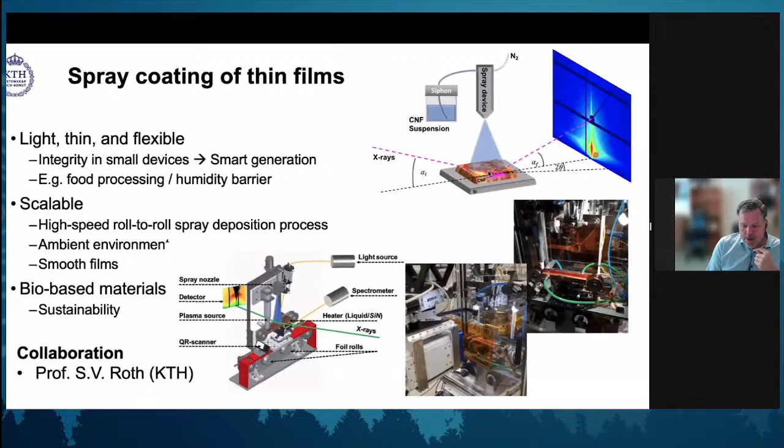Looking at what you get if you use X-rays, so going back one step with grazing incidence coming in, in this case it's X-rays. We will see the effect of spraying on a surface. The reflection you get from the X-rays will be dependent on the nanostructure of this film. So this pattern that we will see is directly dependent on what happens on the surface. And just to show a little bit of the time resolution you can achieve by doing this.

So here we have the spray. We're spraying a film, and we can heat it as well. We can dry it. We can actually see dynamics. So what we'll see is a pattern that changes depending on, now we're spraying a particle with pulses, and then you can also see how this gradually then freezes and becomes a nanoparticle or a nanostructure material. So this is X-rays, and it gives you dynamics.

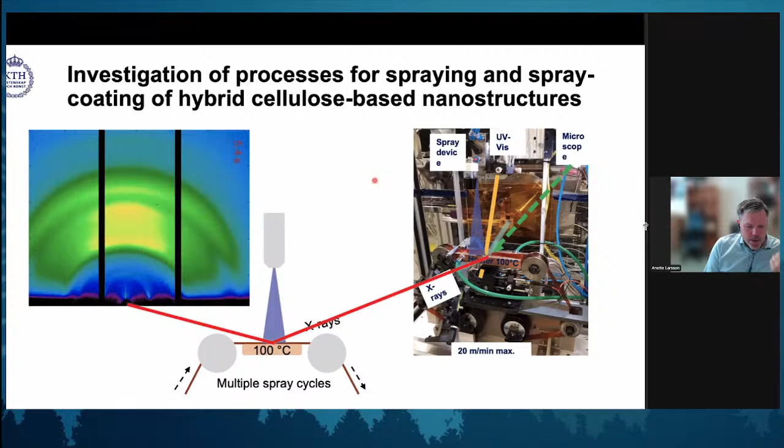So in looking in this, I will talk about two things. Grazing incidence is trying to use the full field or the full detector image by having an incident beam. In this case, I formulated also that grazing incidence scattering. You can do it with neutrons, and you can do it with X-rays. What you will get in grazing incidence is that you get a detector image, and you can use both the lateral and the vertical information to characterize the structure you have in the film.

And we can actually adjust penetration depth, and by looking at this sort of behavior, we can look at nanoparticle heights, roughness, or distances and radius of structure. And we'll get back to that throughout the presentation.

So just taking this simple sample of spraying some fiber-based material. So this is a spraying of TEMPO CNF, different charges. So it actually means a couple of things. It means that it behaves differently because of the surface charge. And the second part is that actually the morphology of the CNF is changing.

By doing this spraying, creating films, you can actually look at the films you get topographically. So that was what we have here. We have, in this case, four different charges. They look slightly different. You can, of course, with AFM start to try to characterize what you see here.

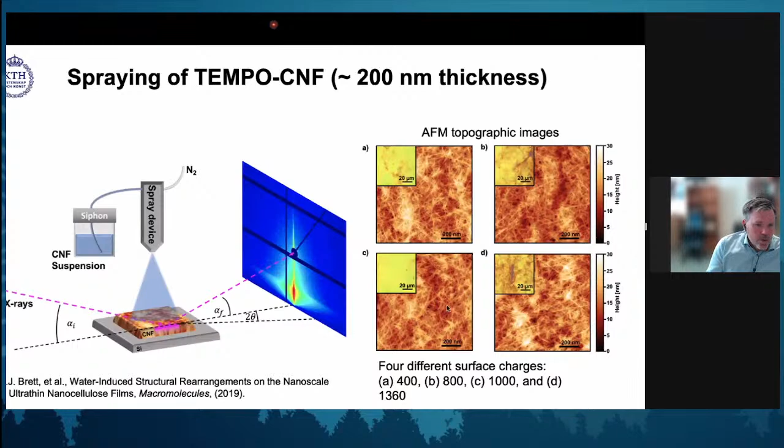Let's assume that everything is simple, and then set up a model that is actually paracrystalline. It assumes that everything we see in the film, if you look at the film from the top, you can see a hole, or you can see fibers stacked together. Let's pretend that when the X-ray comes in, we can depict them all by having these cylinders, and we will choose to have cylinders of a couple of different sizes.

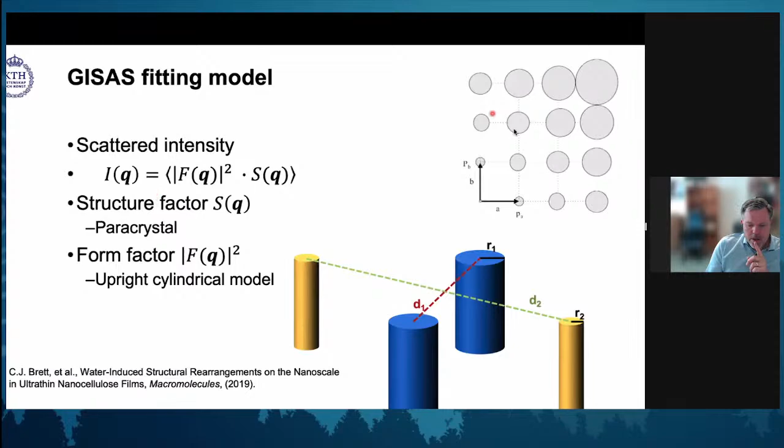So we actually determine that we have a cylinder of a given diameter, distance between themselves, and a different diameter with radius. So we can actually have a set of various sizes. And by doing the grazing incidence, we can take this model, we can fit it to the data. And again, we are fitting now the full field, the full image that we have here.

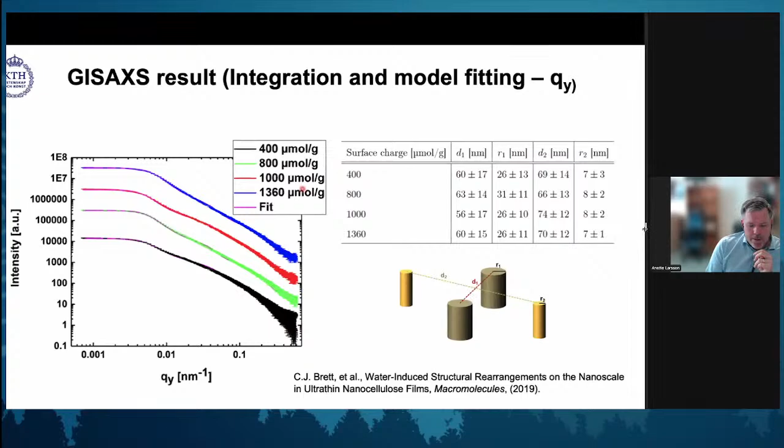If you then integrate it and look at what happens, I will go back, in the Y direction here, we are looking into what happens in the plane of the film as we see it with the incoming beam. What we can see is that we get integrated scattering curves. We can take this model that we have developed and we can fit it. And we can fit it for different charges.

Depending on surface charge, we can determine the structure. If you look at this, you can fit almost everything with two types of objects: something with a large radius and a distance of about 60 nanometers, and something with a small radius with about the same distance. This model fits these curves fairly well.

This gives insight about some sort of bimodal size distribution in the films. This is only looking at material structure, but with cellulose materials we're also sometimes interested in water. It seems water is a problem for most materials, so what happens if you subject these dried films to water?

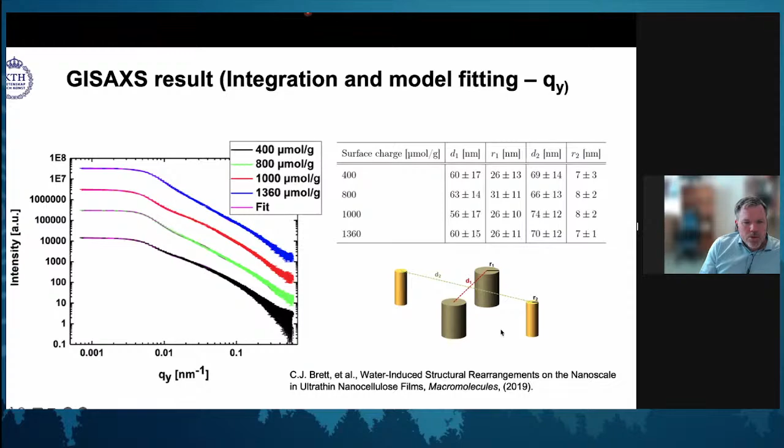If we do this with X-rays, we can still do the characterization, but the X-rays won't make much difference between the water and the cellulose in principle. Cellulose is very close to water, except there's a carbon atom for every water molecule, so it's very hard to differentiate between the water and the cellulose.

So we chose to try this with neutrons. This has a little bit to do with neutrons and a little bit with Japan. We don't have ESS, so we went to one of the best sources available, J-PARC, which is not so far from Fukushima in Japan.

At J-PARC we have a set of PhD students, including Calvin, the main and lead author of this work. What we did, aside from trying Japanese food, was run experiments with different types of neutron techniques. You need a few people to do these experiments. My own experience is that it's slower than doing experiments with X-rays; all measurements take longer.

So what can we do now with neutrons instead of X-rays? We still have a sprayed film. Now, by using D2O, we can exploit the fact that neutrons treat hydrogen and deuterium differently—it's highly absorbed by hydrogen and not by deuterium. So we can start to look at what happens when we add water with deuterium.

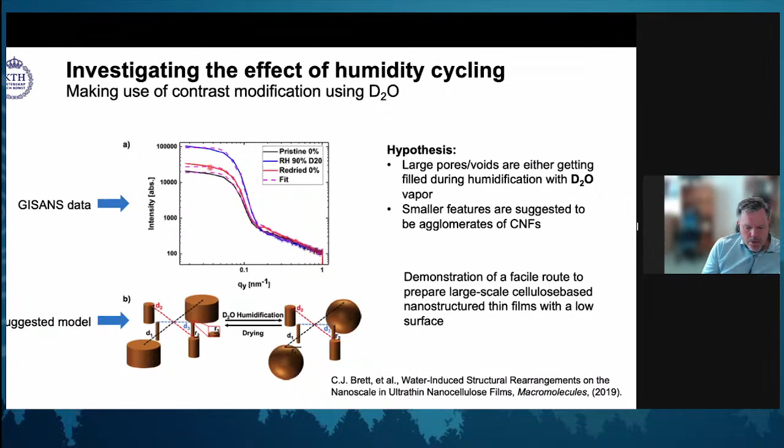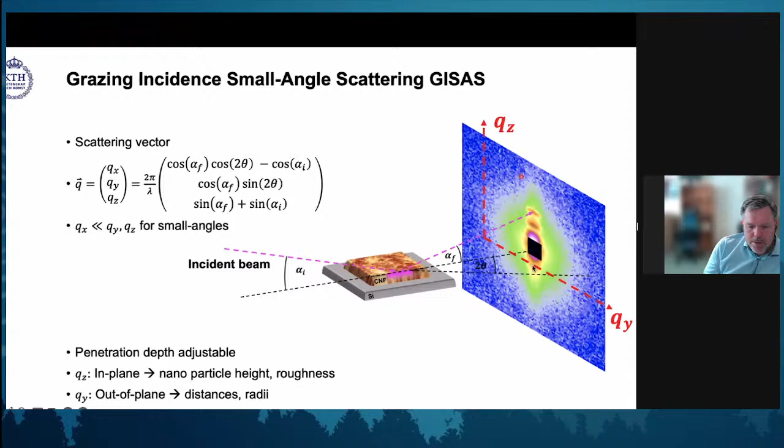Sorry for that. So again, we've been talking about grazing incidence, and we're interested in the full field you can get out of this. Another possibility is to restrict this to only one component, the one out of plane or normal to the surface—working with something called neutron reflectometry.

By doing neutron reflectometry, we can go back and try to understand what happens through the thickness of the film. We get something called the neutron scattering length density as a function of our measurement, which can characterize the density of the material, the amount of material throughout the sheet.

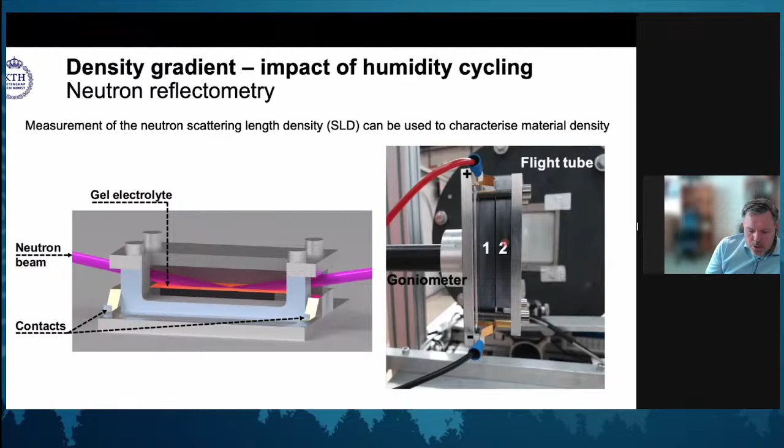So in this case, we have a neutron beam, and our film mounted into the neutron beam. We are looking at what happens only out of plane here, the thickness direction. What we get is an intensity curve throughout the thickness of the sheet. This QZ, which is the inverse, can be translated into the neutron scattering length density as a function of position in our film.

What we can see in this case is that we can understand the effects of humidity cycling and see how that affects the density of the film. By doing all of these things, we can separate water behavior from the dry structure, and then start to think about what the effect of this is.

These measurements typically took an hour to do per sample. In reality, if you do this type of measurement, I want to show how fast the system can be. In this case, we have just sprayed a CNF film on a wafer.

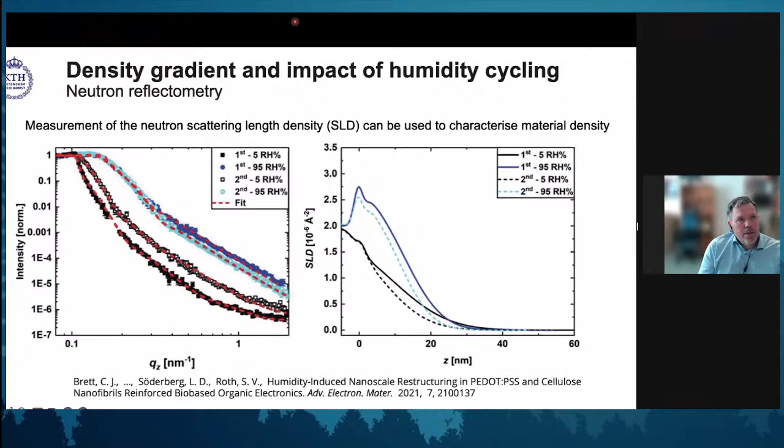Then you can start to think about why do we use neutrons and water. Yes, we want to understand the structural changes. I want to point out that for anyone interested, there is an excellent paper made quite recently that starts to look at something called quasi-elastic neutron scattering.

It is a little bit more advanced technique, needing more material. You can't do this on a thin film, but what you can do is actually use the quasi-elastic neutron scattering to start to think about what is the diffusion of water in a material.

They have done this for different types of CNF and bacterial cellulose, and you can start to understand how water diffuses in cellulosic materials. That makes it possible to separate the diffusion that happens in the spheres we saw when doing our grazing incidence, from the more slow diffuse motion that can also be seen as a part of the structure in itself.

I suggest this is an interesting technique. It has challenges. We are going to try to do it ourselves, but these are the first that I've seen doing it. And as I said, it doesn't work with films—it needs much thicker objects.

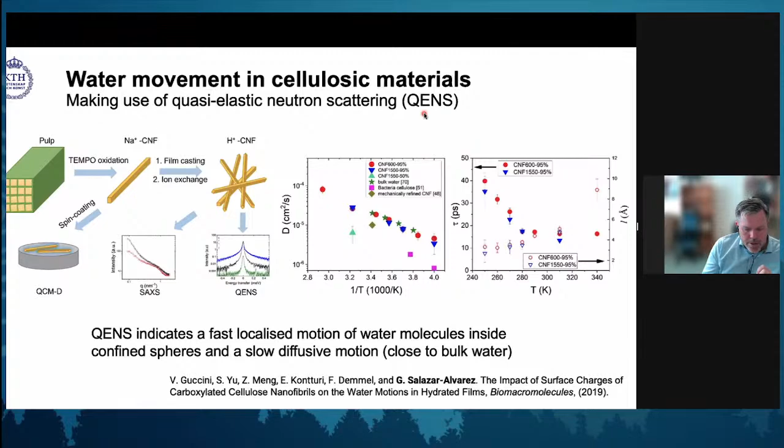So that's two ways of using neutrons. I also think that neutrons have an excellent capability to be used for industrial purposes. Now we're no longer talking about understanding the nanostructure as a potential for future reactive materials—that's the one we saw with Calvin breathing on this surface-coated wafer.

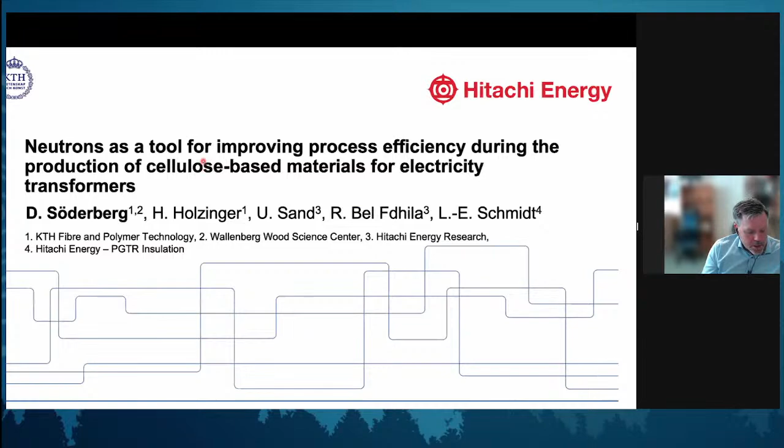We've also been trying to look at what happens for process efficiency, and we're going to look at neutrons as a tool for cellulose-based materials for electricity transformers. The starting point of this is to understand something that I don't think everyone knows.

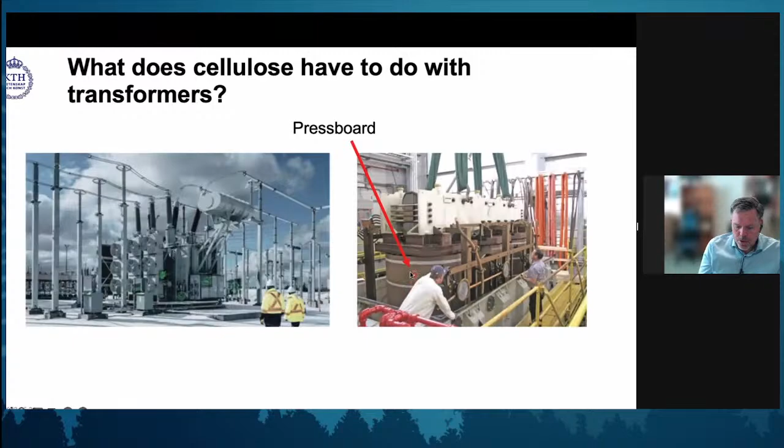It's typically formed by pressing thick cellulose sheets. So what we see here is produced pressboard. See it as a paper sheet, but much thicker. It's made by having sheets that are pressed together, wet, with a certain force, adding heat.

Inside, when you do this, you actually have to add something called wires. And what you do is just press these together, apply the heat, and create a high-density cellulosic material in the center.

This is a process that is well known. It has been used for a long time. Of course, this really is dependent on energy - how much energy do you consume?

One of the key challenges is to both try to optimize energy usage, so you want to reduce energy demand, save lower carbon emission footprint, but you also want to understand the structure of this material, because the pressboard needs to be very uniform as well, not to induce any type of shortages. Because if you have a structure with, for example, a pinhole, you would risk that the transformer burns, which they do from time to time.

So to try to understand this, we start by thinking about what was important. Of course, you have pulp properties that always tend to be important, so the cellulose fibers are a special type - you can't use any type of cellulose fibers. We also know that the fiber network mat that you create is of importance.

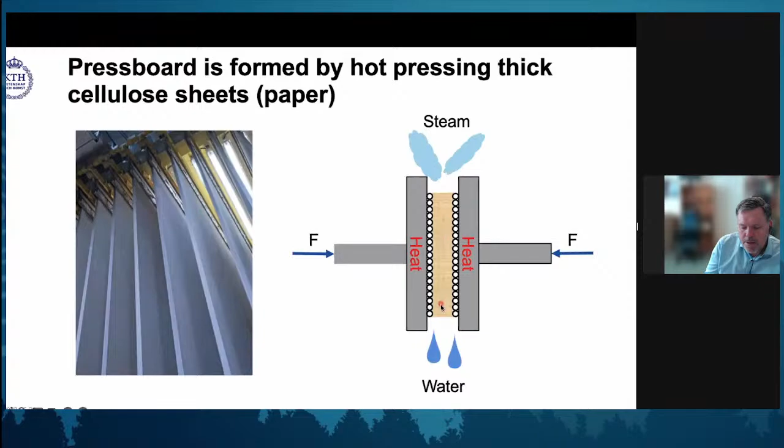What we had as an aim was to understand what happens inside this material. Can we see any type of phenomena that is related to any of these physics that we are interested in?

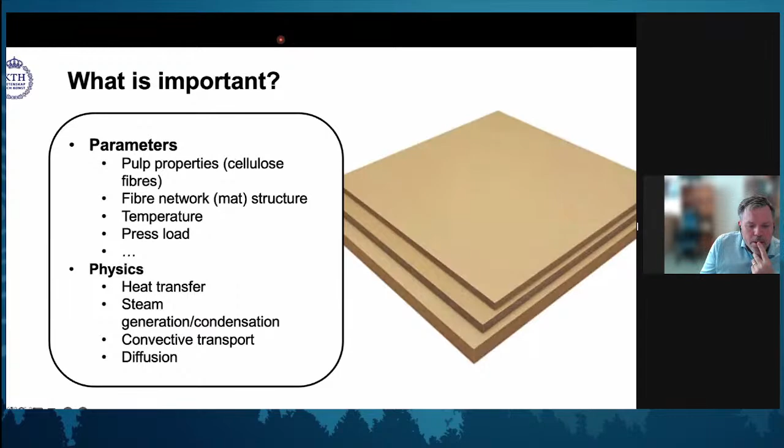So what we did was spend quite a lot of time, and maybe we did not do the correct thing from the beginning - we started to design a setup where we wanted to be able to subject a cellulose bed to heat and pressure and everything.

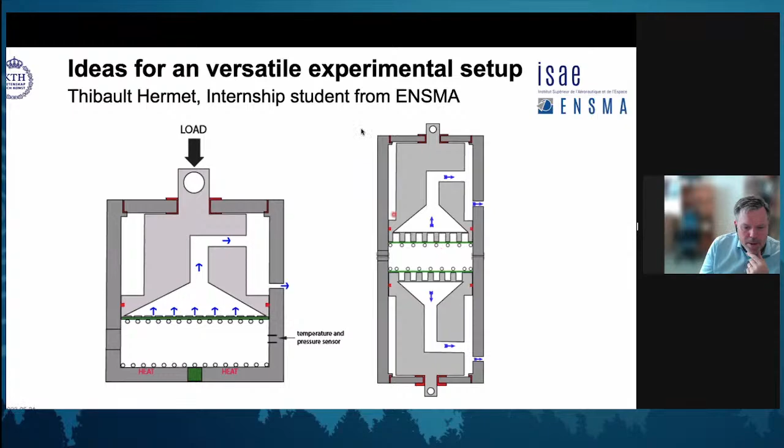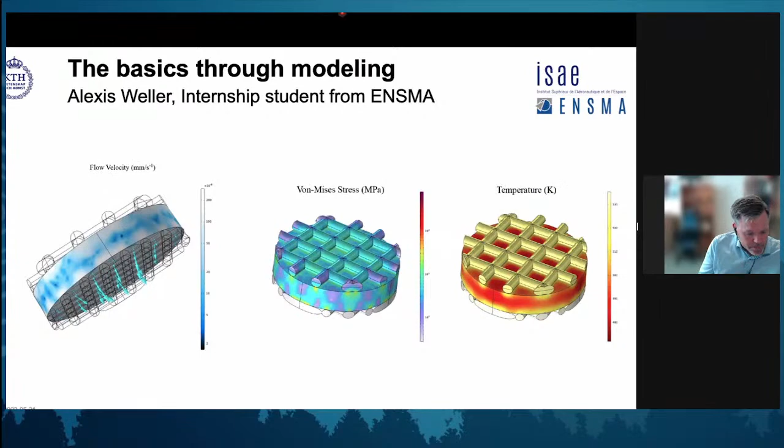We did quite a lot of modeling on this as well, to try to see if we can predict and get a nice design on the system. However, it ended up with another first step, which I always would recommend: reduce the complexity. So all of the first thinking was to have advanced measurement techniques, advanced modeling, but we got

Can you see the spotlight? We can see your marker, but not any spotlight. No, it has disappeared from my screen. So, and the marker, that makes it even more interesting. Let's see if we can - one second, do you still see the marker? Yes, we do. Yes, thank you.

So we ended up with: what is the feasibility of this type of studies? We actually purchased the instrument time through the Vinnova funding. That means that you're not applying for time. It's a little bit faster. We did some measurements for 2 days.

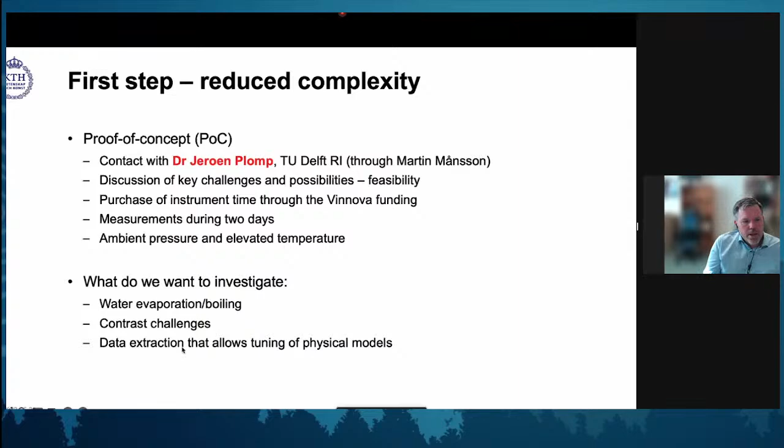We realized that we can't do too much initially with pressure. That requires a lot of safety concerns if you want to work at high pressures, if you at the same time want an elevated temperature, because then it's steam under pressure, and that requires some developments. It ended up with a question that we really want to look at water evaporation and boiling. We want to see what we can actually see in the system, and of course, what can we extract as data.

So instead of this complicated system, we ended up with this very simple wafer design, and that was Jeroen's suggestion. This is a wafer structure made in pure aluminum. So all parts are aluminum, except the bolts. You will get to that. In between, in this wafer, we can put in the fiber mat that is wet. We can't apply pressure, but we can put in something called shims, so we can restrict the dimensions, which of course implies a certain pressure. So we can have different volumes with the same amount of fiber.

We have a holder so that this sheet doesn't by some means fly away when you generate steam. And we can heat the system. We can send the neutrons into this and have the detector on the other side and image what happens to this when heating. So it was a very simple setup, and that turned out to be really good.

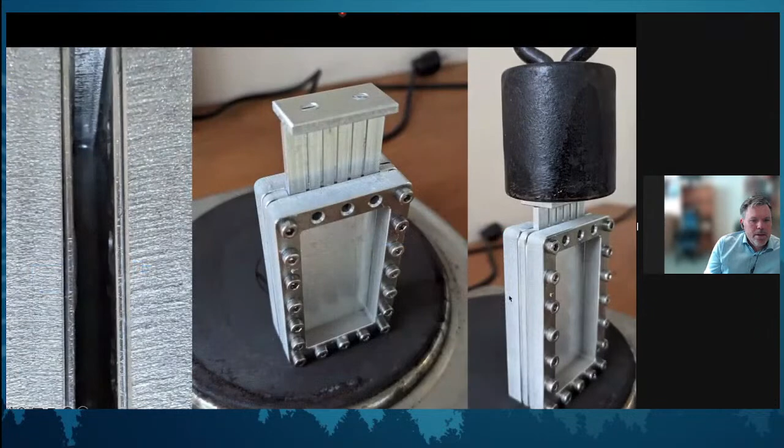Talk about heating. We didn't choose the most complicated heating mechanism. This is a heating plate. It's a stove that was put in a neutron beam. So you could actually lift it up to get in contact with this aluminum wafer system. And then by using an IR camera, we could see that the heating of the aluminum is very, very quick. So this was the only heating we had.

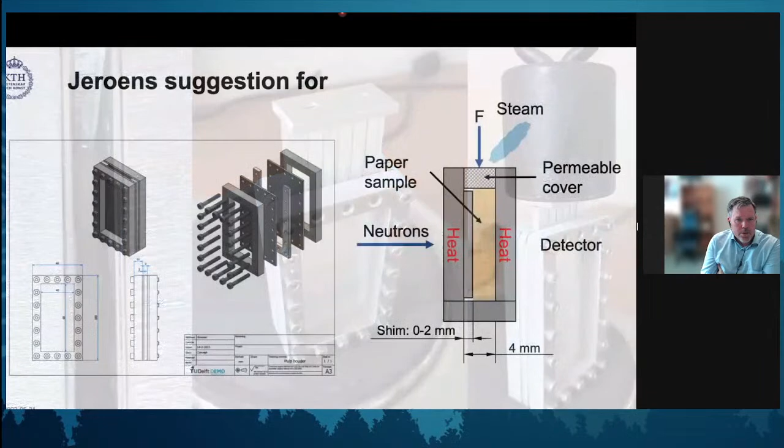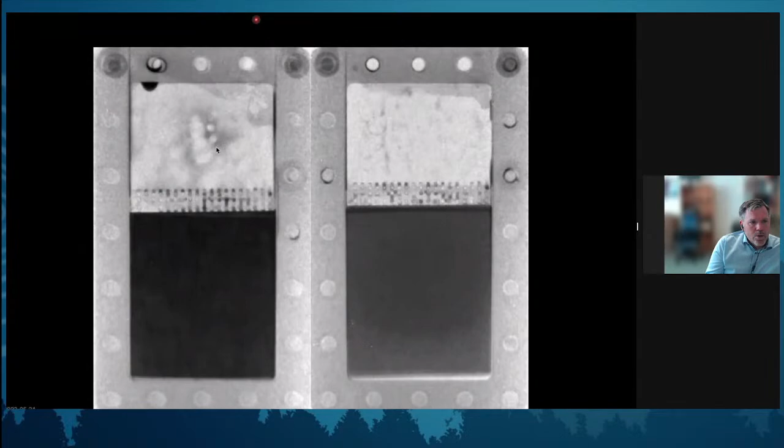And now we're going to see two different measurements made at two different times, but with the same time resolution. There are 2 seconds between each image. And we can see that we are heating it up. We can see that water is disappearing from the holes. We can also see that something is starting to happen inside. You can see that it's boiling here even. So all water has to go out through the top. This is then the place holder for the system.

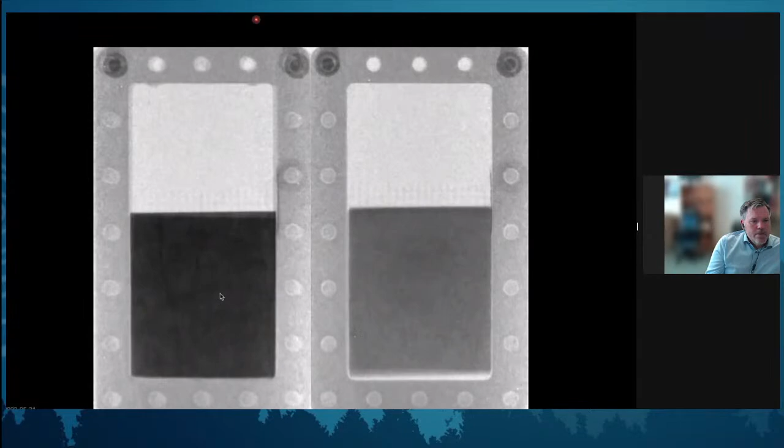We can see that in the right one something happens, there's a spot here, and what happens is that it dries. And when the right one has dried, we still have not dried the left one that had twice the amount of water. Now we can see that it starts to dry eventually at the edges.

And it takes a much longer time to dry for the left one than the right one. Sorry. So what we see is that it dries, and we get a spot in the center as well here. And when we reach the total, all water is taken away, we can see that the amount of cellulose is actually the same. So the only thing that differed when we started was that we had about twice the amount of water in the left one.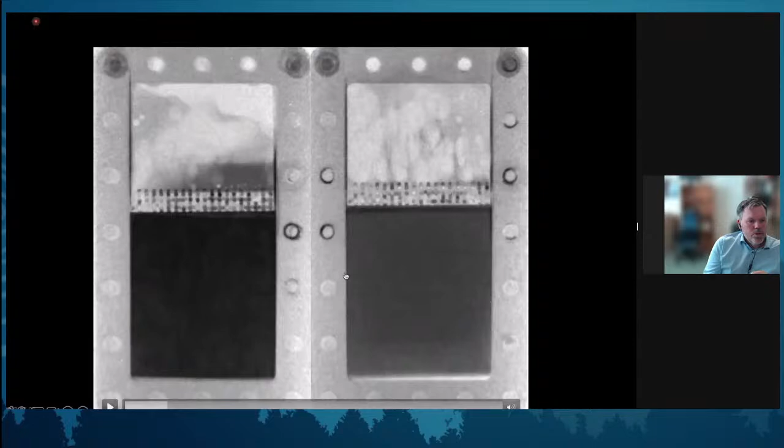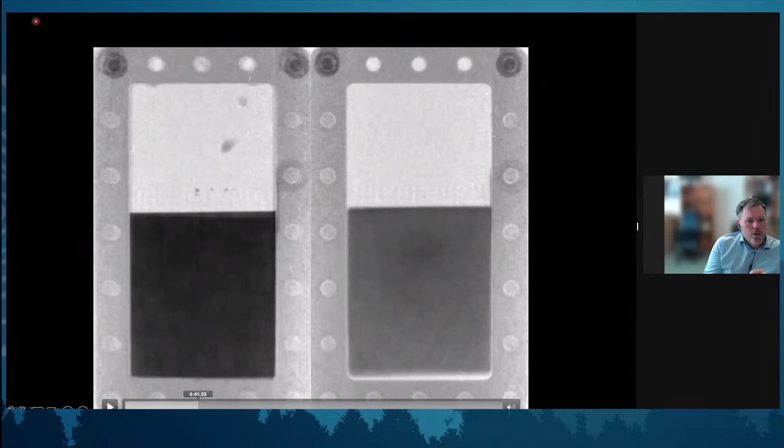And at the end, we can only see the cellulose because it's hydrogen there. It's the same amount of cellulose, so we can actually see also a little bit of the structure of the material. Just to point out something that happens in the end when drying. So please have a look at the right one. Look at the edge when we're drying now. So we have water still here. This is dry. And then now all water is gone. And the last thing that happens is that this piece of cellulose actually also shrinks. So we can study the shrinkage of the material.

So then you can ask what can you get out of this? Then comes the part that will be in the exam for this seminar. There are actually models, and this is nothing that we did. We just took it from literature, but this is boiling because that's what we're studying. We have a static porous media, since we're not dynamically compressing it, but we just have the same amount of fibers. It's kind of static, it's porous. And then you have a set of equations describing the boiling, which means that you have both water and you have vapor, because you can have the different phases. You can have a vapor phase and you can have a liquid phase.

If you take all of this, you can actually take the measurements that were done, very simple measurements. It's a 2D measurement, so that of course contains information of what happens because we have a shrinking blob in the center. But if you evaluate the drying of it, you can actually take the measurement and extract data for modeling. So when we have the measurement, we knew that the amount of neutrons that we detect is related to the amount of water we have. So by this, we can actually normalize it such that we can measure the exact amount of water and fit the model as depicted to what we have seen in the image.

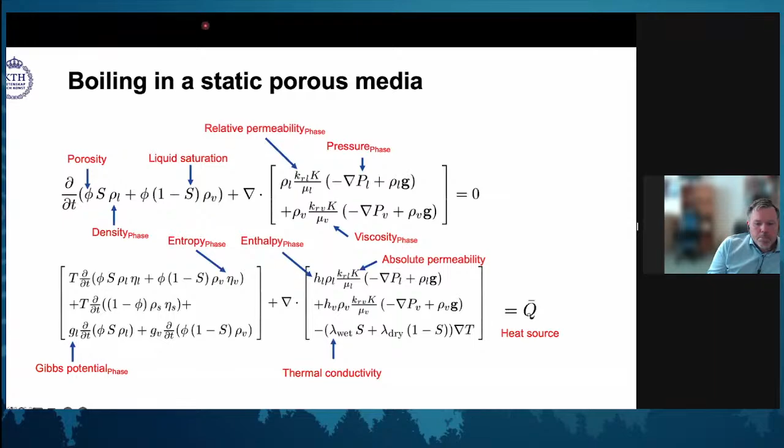Just as an example, the alternative is to just look at pure boiling, then it's just linear with time. So you supply heat, water evaporates. It's all about the time spent heated. But by doing this modeling, we can actually start to extract data and parameters. So some of the parameters here for the different phases can be extracted by fitting the model. And doing this, we can actually see that next steps would be to develop this and include dynamic features. And you would like to go so far that you could develop a model that can be used for controlling the industrial process. All of this based on neutrons giving you a possibility to measure something that is almost impossible with any other technique.

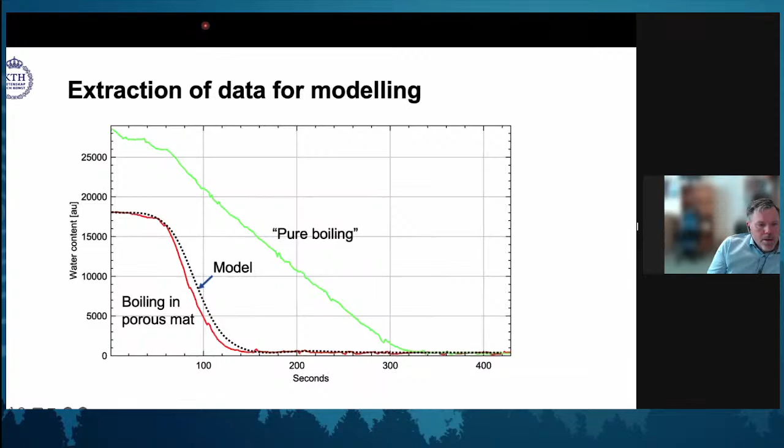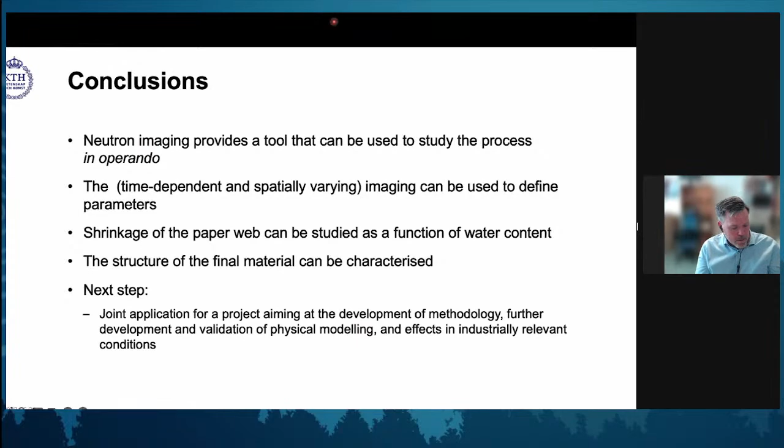So the conclusion from this study was that neutron imaging was an interesting technique. It was in operando. The time dependence and spatial variation mean that we have a lot of data that helps us extract parameters. A little bit cool that you can look at shrinkage of paper webs. We can even look at structure of the final material, and we are together now looking at a continued project to take this further with also the dynamic system of pressing, as I said. So that is 3 things that we have done with neutrons. It can be used for fibers. It's super good if you want to separate behavior of water or not.

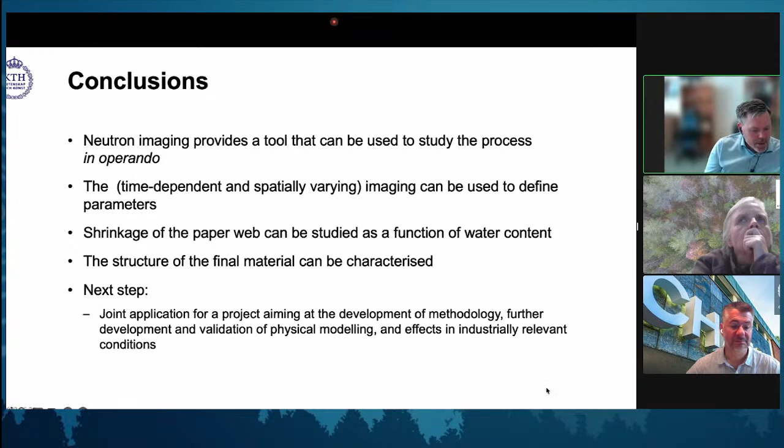And as a last point, I just want to throw this in, Alexander. Please apply to ForMAX if you have ideas. And if you're interested, you can also always discuss with Alexander what you should do. He's always available to answer your questions.